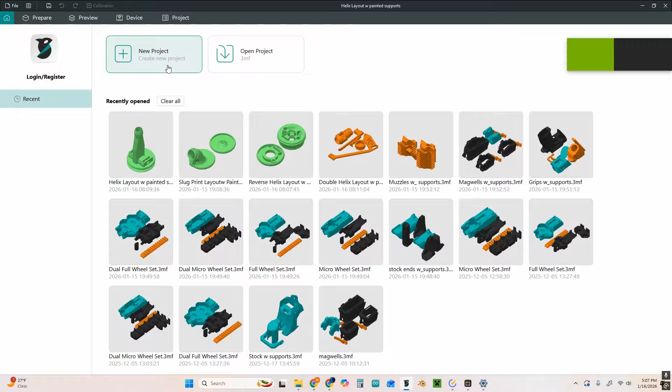Alright, so for reverse Helix, you just download the files, open up your slicer, start a new project, or it'll do that automatically depending. Unzip the file, and in there you should find the reverse Helix layout with painted supports. Click and drag that into your slicer, give it a minute to load, and everything should be divided by plate with TPU, secondary color, primary color, and orange parts.

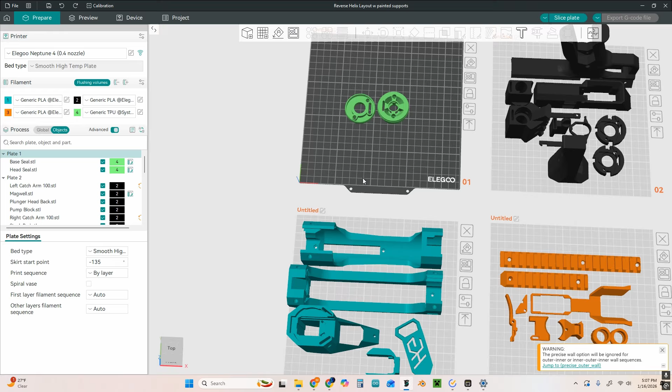Obviously, you can mix and match them if you want. This is just how they are laid out in the file network and how they'd be ordered. So on the first plate, we have the TPU parts.

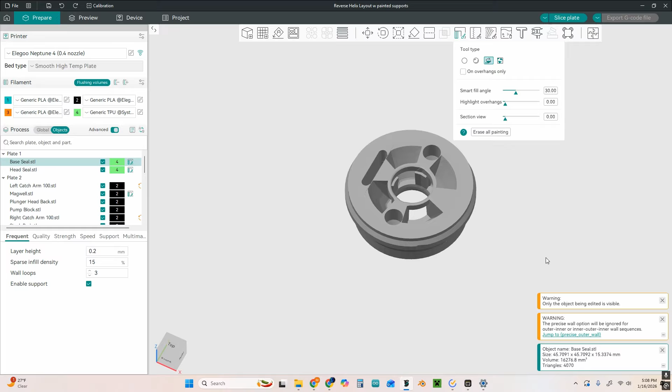Both TPU parts need a little bit of support. This first one just on the inner ring, and the other one on the inside of the barrel brace, or barrel support area, just in these 4 spots. It's not too hard to take out those supports with bare pliers, and I'm not sure how well this part prints without them, but you can try that if you'd like.

I would highly recommend, if we're printing the head seal, making sure that your printer and your profile are somewhat tuned for printing TPU, as this part is going to change the performance of your blaster a fair amount.

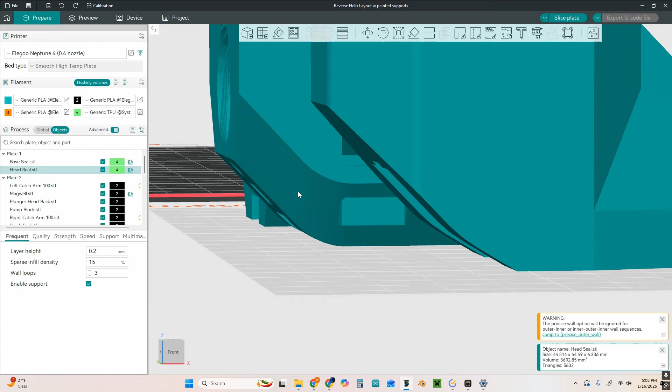Then coming over to the secondary color, the main things to call out are that for both of the catch arms, as well as for the catch itself, I'd recommend adding extra wall loops. You can add extra infill too, but these are very small parts, so the wall loops fill it in rather quickly.

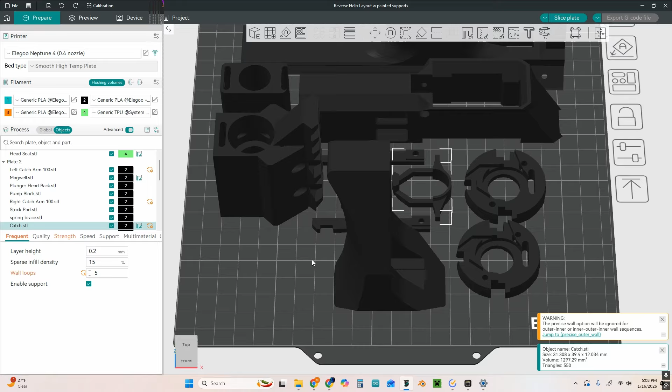When it comes to supports, the pump block, spring brace, stock pad, front and back of the plunger head, those all don't need supports. The pusher doesn't need them either, and the catch arms don't. The catch itself does, because of the 2 little grooves on it.

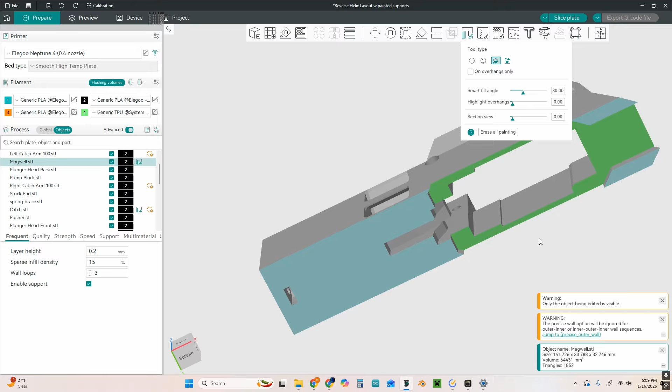When it comes to the magwell, that one's just supports on this area here, but otherwise is fine running without them. And the grip wants a whole lot of supports, mostly on the bottom faces here, and then also on the inside of the trigger guard, and in these areas on the side for the 2 sidebars in the blaster.

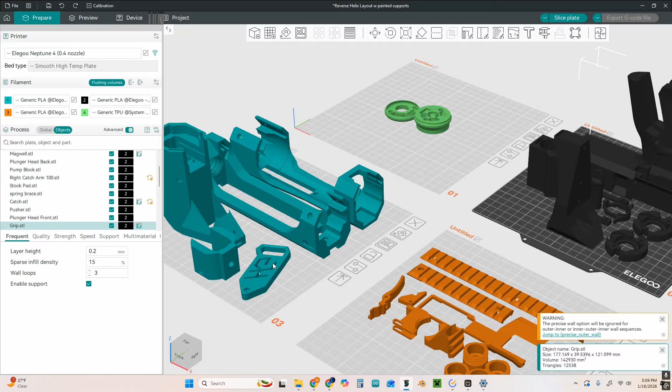Then coming over here to the primary colors, the end piece here doesn't need any supports, neither does the seal mount or the grip insert, but the front and middle pieces, both front and middle sections, both want a bit of support.

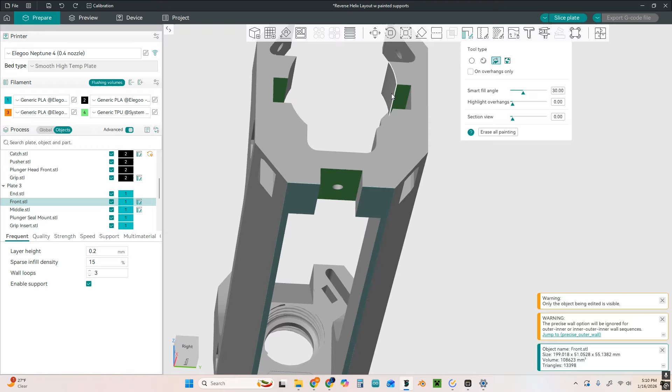The front section wants it in these 2 spots for the windy rail, as well as in these spots at the back for the catch arms. And then the middle spot, again, wants some for the area with the windy rail and for the catch arms.

Also in the back here, I like to add a bit of support at the top. Depending on how good your printer is at bridging, you might not need it, but it's still a good peace of mind.

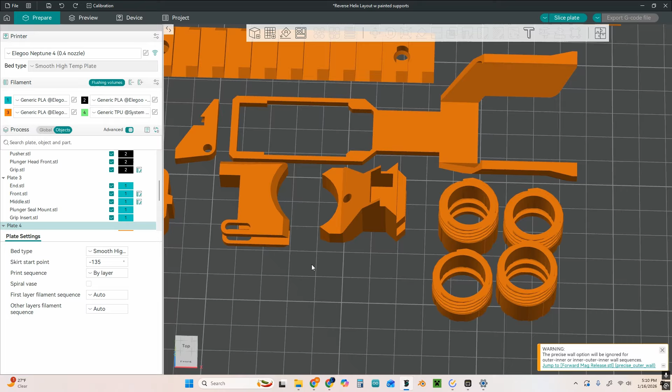Then coming over here to the orange parts, the main things to call out are that both sections of rail need support on the bottom of them. They're not very well optimized for printing, but do look rather nice.

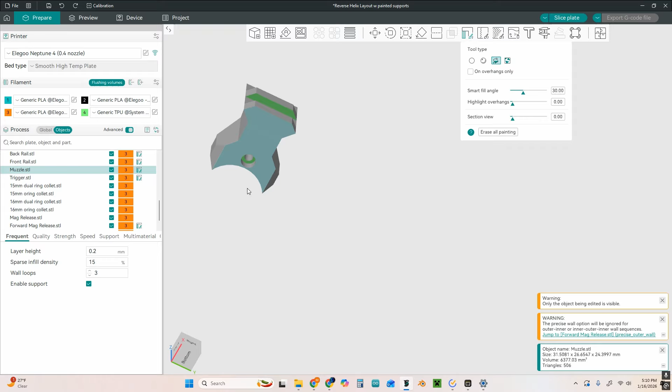The forward mag release also needs a bit of support on these front areas. The muzzle, again, support on the one rail and in the spot for the bolt. The trigger wants a bit of support on these overhanging faces. The mag release and trigger lever don't need any supports, neither do the barrel mounts or collets as they're labeled.

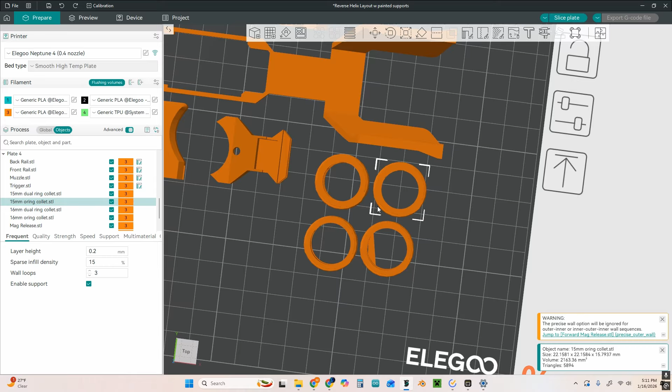Now when it comes to the collets, for reverse Helix currently, it only uses 15mm barrels, and you're going to want to print out 2 collets, 1 single ring, and the other can be single or double ring. So what that would look like at the moment is you could get rid of the 2 16mm and print out 1 of each 15. You could also print out 2 single ring collets.

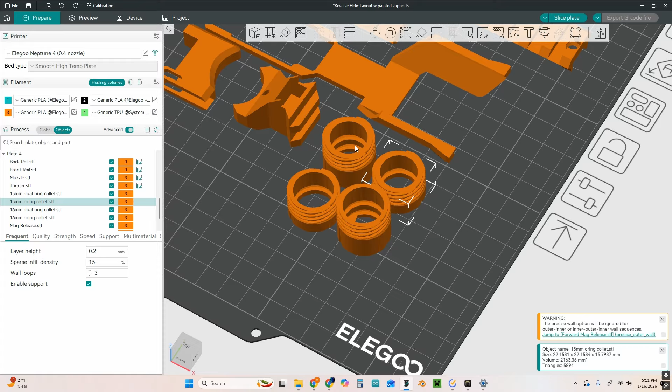And what that really changes is how much barrel retention force there is. I found 2 single rings will do just fine, but if you're having issues of the barrel slipping, then adding the double ring in there can solve that issue.

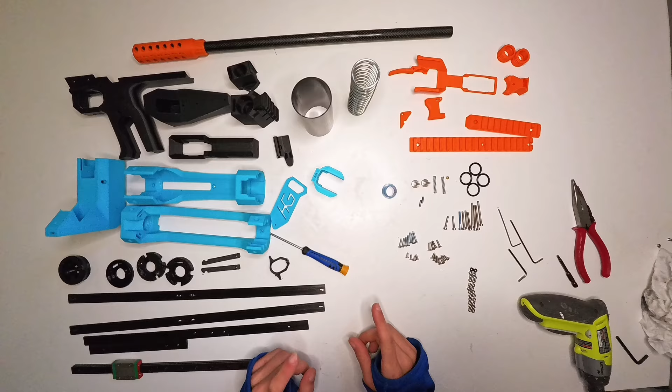Alrighty, now for the complicated one, I guess. For this one, I also had a couple of screws that weren't able to come out, or a couple of nuts rather, that I wasn't able to take all the way out. So while I have the full selection over here, I will be putting some of them off to the side when they would be going into the blaster. But with that out of the way, let's get building.

First simple thing, we're just going to assemble these two, the barrel mounts, squeeze the O-ring a little bit, put the one side in, into the groove in there, then you can push the other end to get it in, and wiggle it around to put it in.

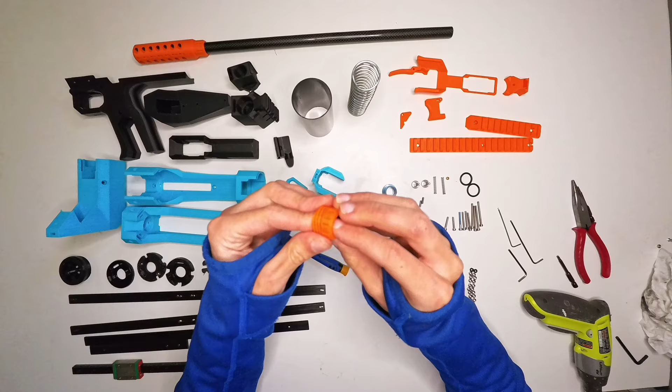There we go, that's those two things.

Next up, we'll do the plunger head. It's going to be these parts: bushing, 2 of the M3 nuts. As you can see, they're already in there. In yours, they should be a relatively easy push fit.

2 of the second longest screw, and then we need the catch and the other 2 O-rings. One other note for this is, in mine, I'm going to put the bushing in from the front. For yours, it would be going into this piece, and then the seal would be sandwiching over the top of it. Whereas for mine, the seal will be going on it, and then this will be going through it.

Also these things are covered in lube because the blaster was assembled a couple minutes ago. First thing we're going to do here, in yours, it would be putting the bushing through here, so that we can put the catch on. For mine, it's going to be putting the bushing through here, and then through that other part.

There we go. So for yours, this would just be the bushing going on the front. For mine, it's both the bushing and the front seal. But it goes together, something like that.

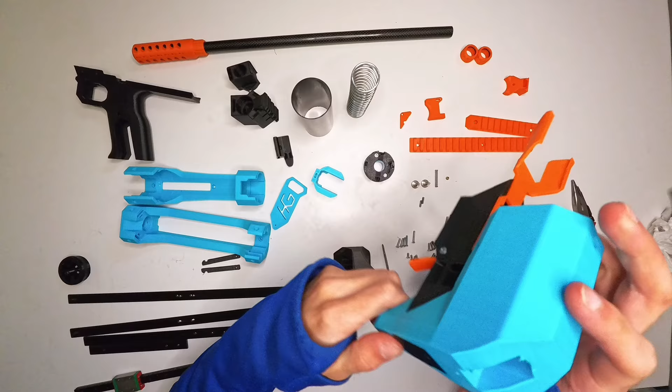But there we go, and that should end up just about flush with the back. If it's not quite flush, the stock pad and the bolts through it will take care of that.

So now I'll take the other three bolts of that same length, put one in each of these spaces. Like so. And then they will each tighten on one of those, go into one of those spots and tighten down.

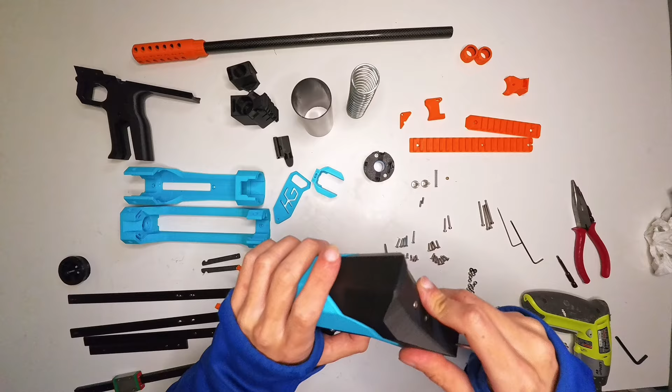That can also fall out. It's not too hard to put it back in, so don't worry too much about that.

Looks like on mine, one of the nuts has stripped its location, so that one won't be going in. On yours, the tolerances should be such that that won't happen, but mine being an older version, and one that's come apart a couple of times, things like this start to happen. So we got those in, and I'll do a couple of threads on this bottom one, but as we just saw, it's not going to tighten all the way down.

Next up, we're going to go for the grip. So the grip, the insert, the trigger, and the trigger lever, and one of these short bolts, the longest screw, and then it would be 5 of the nuts. On mine, the fit is on these is such that you want a dot of glue to hold them in. On yours, they should hold in on their own. But that is where these 4 would go.

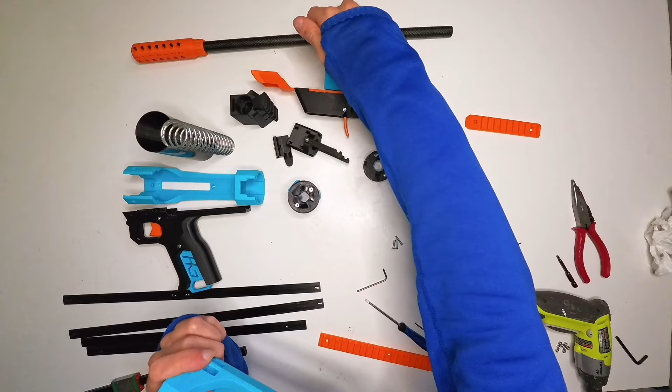Another thing, if you're encountering that a lot, is to just take a sanding pad and take a little bit of material off the outside of this to reduce friction with the bushing. It can also just be a problem of not putting lube on the inside of the bushing when assembling it, which we'll get to in a minute. But now we have that part together.

So we're going to take our linear rail, flip it over, and put it in the top, right like so. And then you're going to want to line up a hole in the front there.

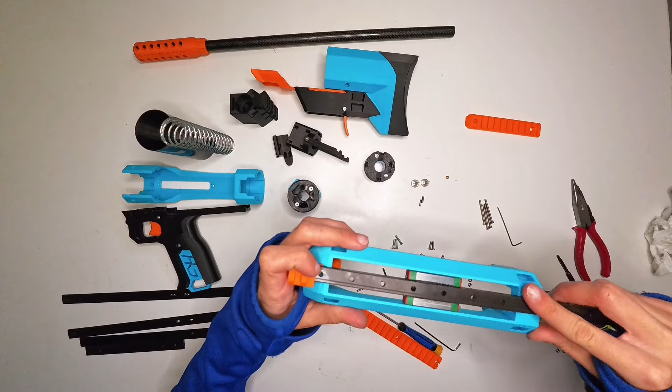We have the front rail. This part goes to the front of the blaster. And we'll take our screw, put it right in there. We'll take our longer remaining screw, put it right in there.

And tighten that down. You don't want to tighten it all the way, because as you can see, we'll need to move the rail around a little bit to line up some of these other holes.

The other thing we'll do is take the heat set insert, one of the 10mm screws, and put it through the other hole in the rail, and the heat set insert opposite it. And then we can tighten that down.

Like so. And then for the last one, we'll take one of our M3 nuts, one of the 12mm screws, one of the 14mm screws, and we can just put that through, tighten it down, and we have our linear rail as secured as it'll get to, as it will be to this part in particular.

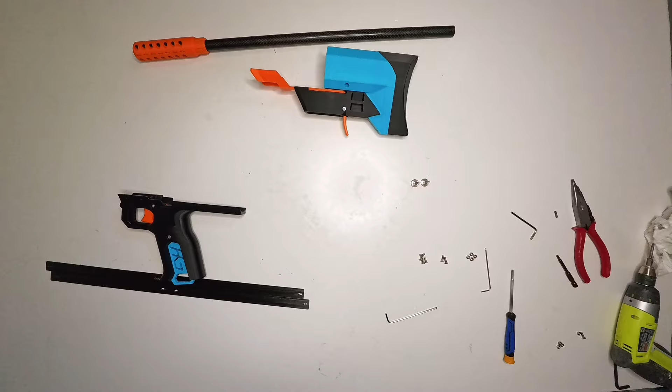So you can work to get that on there. Looks like I won't be able to do that this time, but take your pusher, put an M3 nut in the side. That should press fit pretty nicely, like so. You can take a longer remaining screw, push that back, slide the pusher on the end, and then tighten the one screw through. Like so. And there's a little bit of space there if you can't get that screw all the way flush.

So now at this point with the blaster, if it's the first time you're assembling it, the catch hasn't been used yet. What I would recommend is real quick putting the stock on there and a foregrip, and putting the barrel in, which will just push in from the front, prime it, bring it back, bring it forward, and then force it to fire using like a pair of pliers or something like that, just hitting the catch pad. And then that just makes sure that when you have it fully assembled, it'll be working right then, as opposed to needing to take it apart to make that happen.

So again, that'd be putting this on the back, putting the barrel through the front, putting a foregrip on it, priming it, bracing against your knee or something like that. And then bringing that forward, hitting the catch pad, which will end up in here. And then after that, you can continue assembling it, as we're going to do, to get it fully working and in battle ready condition.

So what we're going to do next, we're going to grab our grip. Again, these four in the top here should press fit pretty nicely. If they don't, putting a dot of glue on them isn't going to hurt anything. And that's going to go in like that, and slide it back.

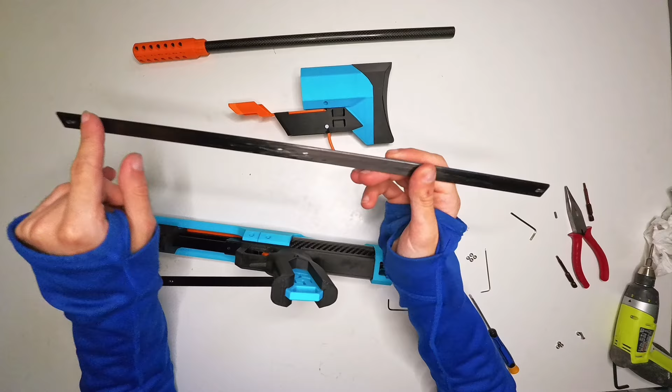And then we have two sidebars. Now one end of these has the holes, well, these two holes are slightly closer to one end than the other, so I'm just going to double check I have that correct, which I do. I just want to make sure that when you put it in, these three holes are going to line up in these three spots for each of the sidebars. And those should slide in pretty nicely from the rear of the blaster. So you can roll those in and then start sliding them through.

And this can take a little bit of force to get through, but shouldn't take too much. If you feel like you're putting a lot of force on it, then double check that there's no flashing or anything like that, no elephant's footing, no seam lines or anything like that that are in the way.

They should slide in pretty nicely. You may need to flex parts a little bit to get them to go in, but that is relatively normal. Okay, so then we have the four 8mm screws, which are going to go in the four holes above the grip. I believe only 2 or 3 of mine are lined up enough to do, but pretty straightforward.

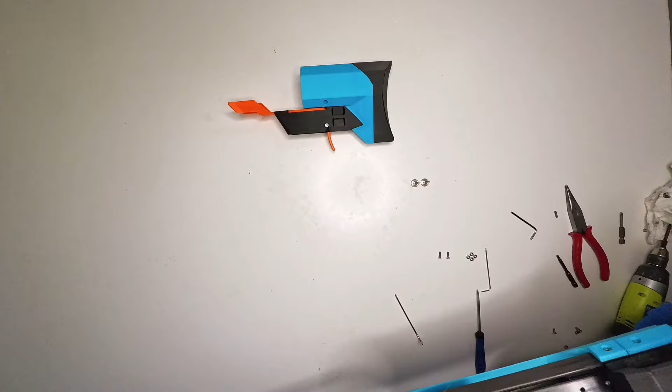And if everything lines up, just go right all the way back.

The main thing when you push this back to look in there is that you don't see any blue from the bushing. The bushings might change color to be black at some point, but just try and get the barrel in so that you see a little bit of venting in the plunger base and not any other changes in texture in there.

So just pushing this back in. So that's good.

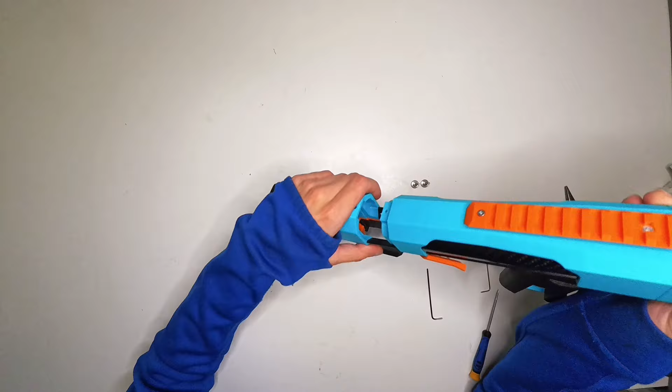And then you put an M3 nut into those spots. For mine, they aren't staying in, so we'll put it in there. Put an M3 nut in each of those spots for the thumb screws for the stock. And then this is coming from the top at a little bit of an angle, like so. Then you should be able to push them together, and that will snap up and over the bars.

And you just press the blaster together, and there you go. And it looks like one or both of my thumb screws might have lined up. If you're wondering why thumb screws, well, because if anything happens with the blaster, or it jams, or anything like that, this is the area that you'll need to be able to get to pretty easily.

If it's something like getting a dart in the plunger tube, that might take a bit more work to get at, but it'll generally do just fine for any other kinds of jamming or anything like that.

Also, if you're working with Dragon Claw mags, the ones that came with the Seagull, I found that those can cause some issues with the top dart being not quite level, which can lead to it misfeeding in this system. Just because I can't have a guide for the top dart like most designs do, because that's where the top priming bar goes.

But just prime that back to make it catch, so that we can put in the last two nuts and screws in the front there. They're just going to go in those two slots.

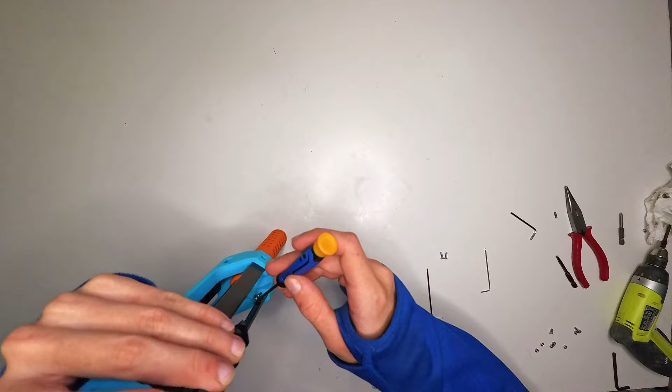It's a great spot to use a little screwdriver to nail them into place. And then the screws will just go in through these two holes, like so.

And like most of my designs, this is dry fire safe, more so than some because this is a TPU part, and the front of the plunger head is also TPU. So, there you go. Again, Dragon Claw mags don't tend to work the best in this design for whatever reason. 18 round curved talons seem to do alright, but just be aware that curved mags can cause an issue.